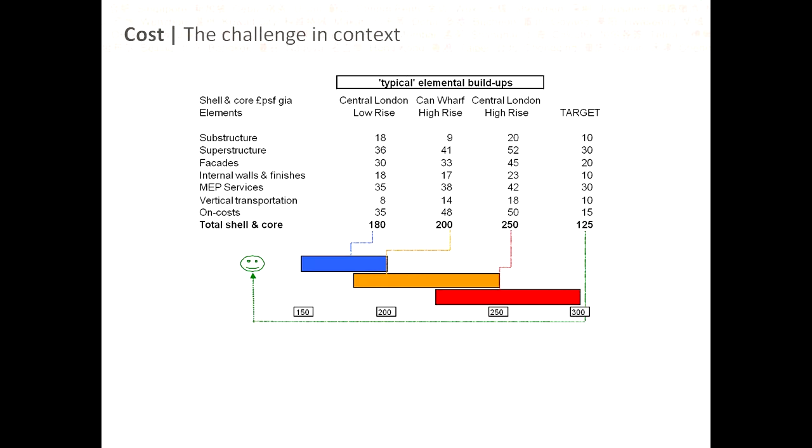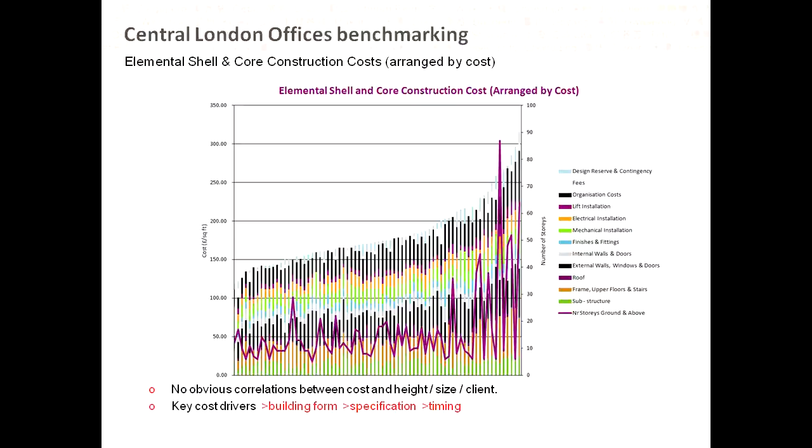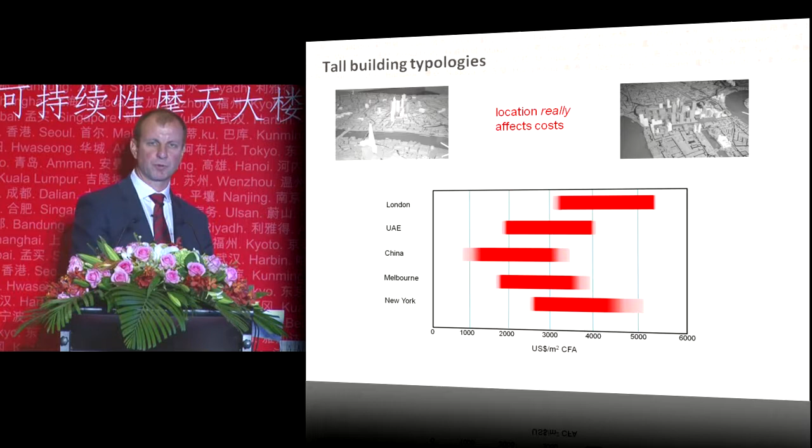During the study, we're also keen to try and learn lessons from around the world. As you can imagine, there's a large range of costs globally too. Some of that is down to labour costs, some of that is down to other factors, but again, shape plays a large part of that. Even in London, where you've got the fat functional towers of Canary Wharf in the Docklands area to the east of the city, very, very different cost profiles to the more articulated landmark forms in the centre of town.

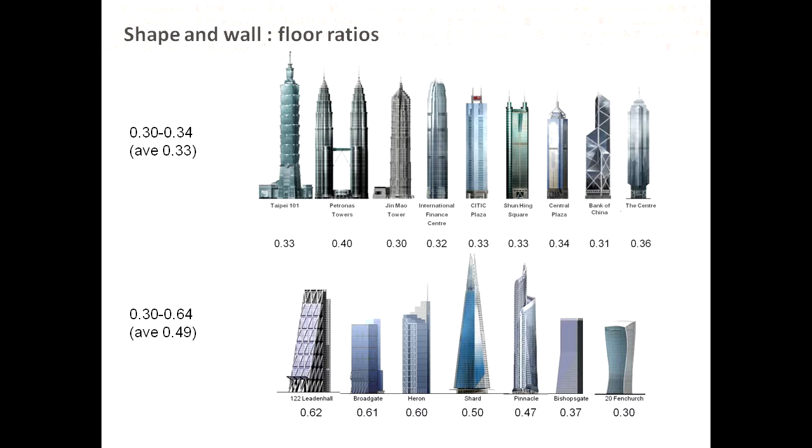So those Asian buildings along the top, although architecturally very interesting, iconic structures, perform very well in terms of that metric. Whereas along the bottom, those selection of London buildings don't. Most of those are 0.5, 0.6. So to a large degree, some of those, before you even start thinking about the specification of facades, have double the quantity of the facades, and that can affect the bottom line by over 10%.

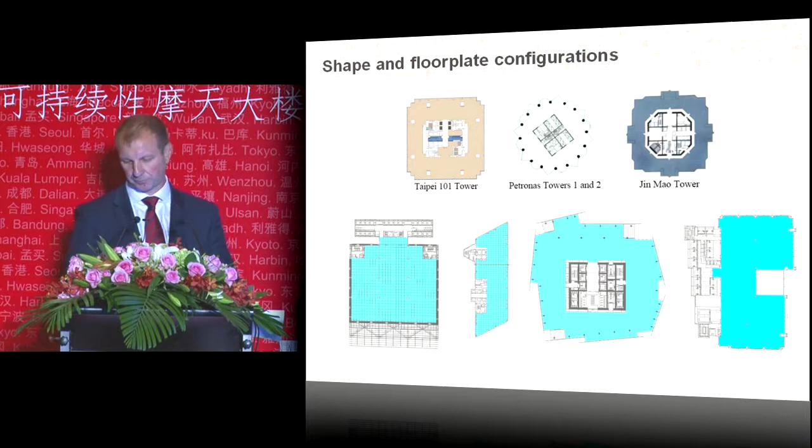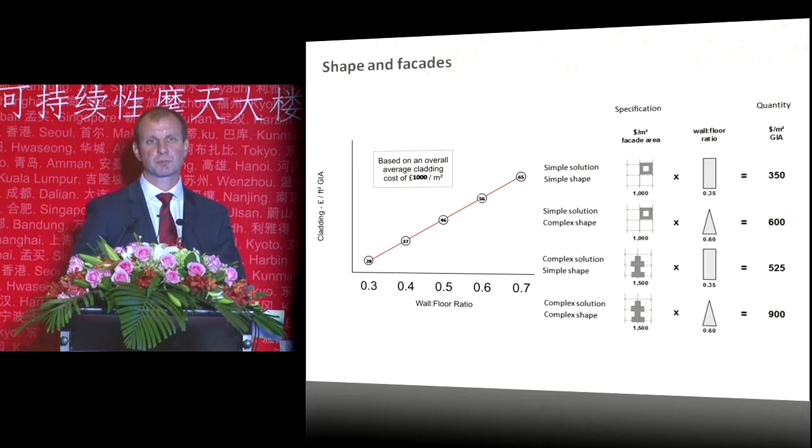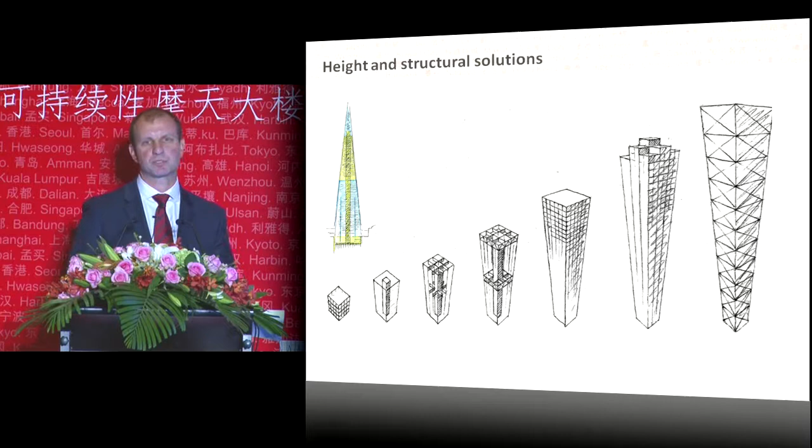Actually, it's a very, very simple structural solution in relative terms. It's got a very large central concrete core which copes with most of the lateral wind loads, and therefore it enables it to have a pretty simple steel frame around it.

You then compare that to the Leadenhall building, which is a very different approach for different reasons, but that's a relatively complex exterior megaframe. It's expensive and it's quite involved, but it does create a large, impressive office floor plate with few columns. It also enables quite a nice interaction at the base with the public realm surrounding it. So there's a value equation there too.

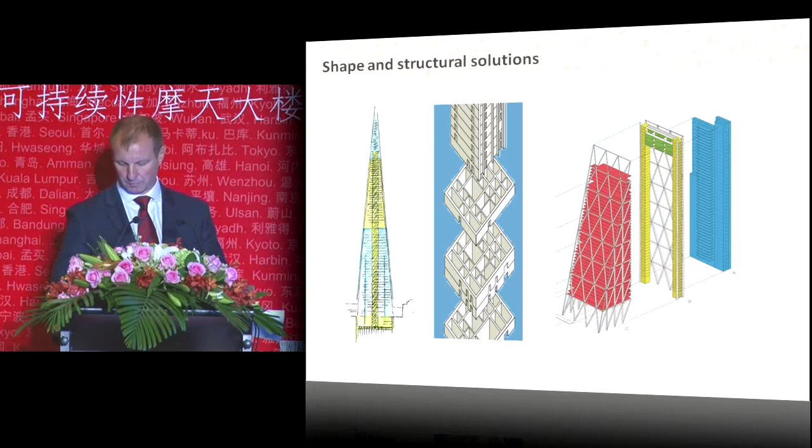So after 8 or 9 months, these were the forms that we came up with as being perhaps the optimized floor plates for this challenge that Sir Stuart set us. In the process of this cost evaluation, what we realized is that we're actually creating a baseline building. So it's not a design. It's a form of optioneering and being able to make comparisons on a quantitative basis, which we really don't do that often. Not at this speed and these amounts of options normally.

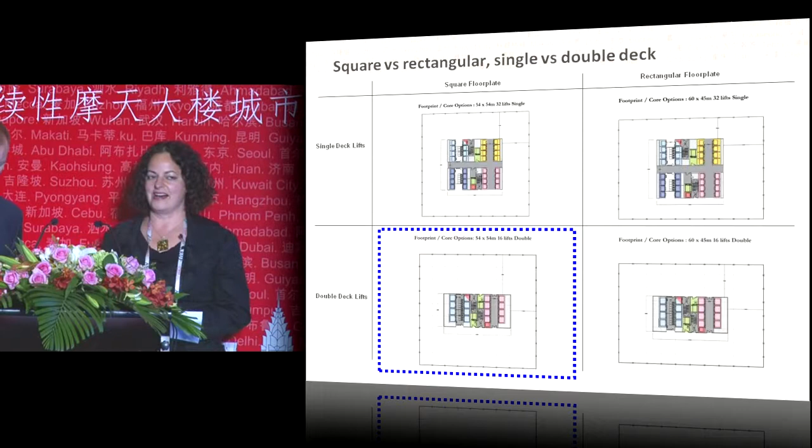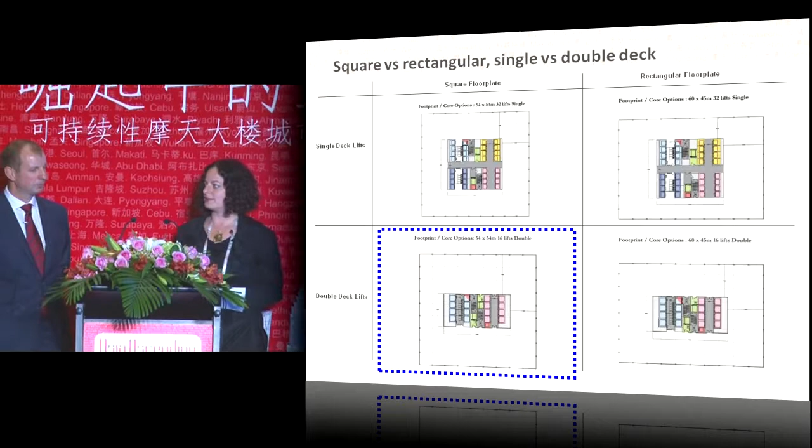We did opt for the square floor plate in the end, with double-decker lifts, curtain wall facade, long span steel building, and at that point we were asking, well, okay, but how sustainable is this option now? So from a cost perspective, just remember that challenge I set in one of the earlier slides, £250 a square foot.

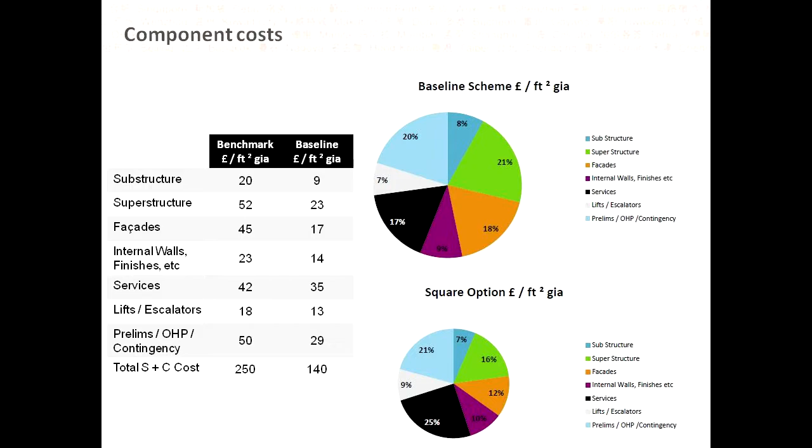Frankly, I didn't think we had a chance of getting anywhere near to it, but we did. We got to about £140 a square foot. So in London terms, actually, that's pretty good for a low-rise building, let alone a high-rise building. And it was really the structures and the facades where the money just fell out of the equation.

And then that had a consequent effect on costs such as main contractors, preliminaries, contingencies, and overheads and profit, because we were simplifying a building, we were de-risking it. So what's interesting about that is that when you look at the new baseline scheme, what that does do is increase the relative importance of MEP services systems.

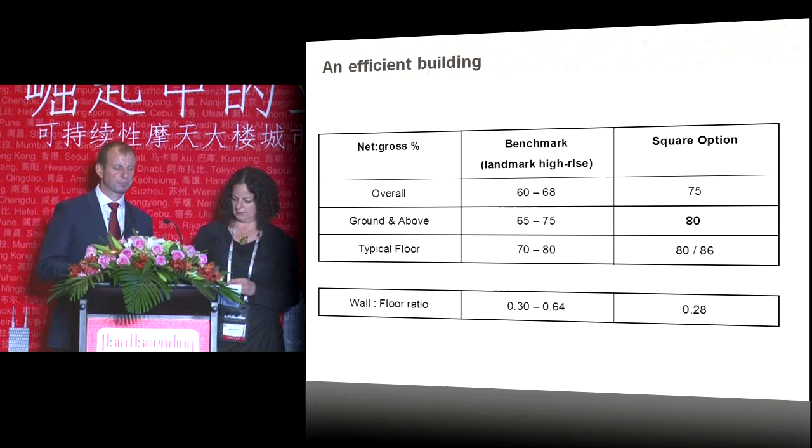And the systems that we ended up evaluating against one another were the curtain wall versus the concrete precast facade, the long span steel, long span concrete with downstand beams, the post-tension concrete versus the short span steel. The MEP systems were the VAV system versus the fan coil, the chilled beam, and then centralized versus decentralized.

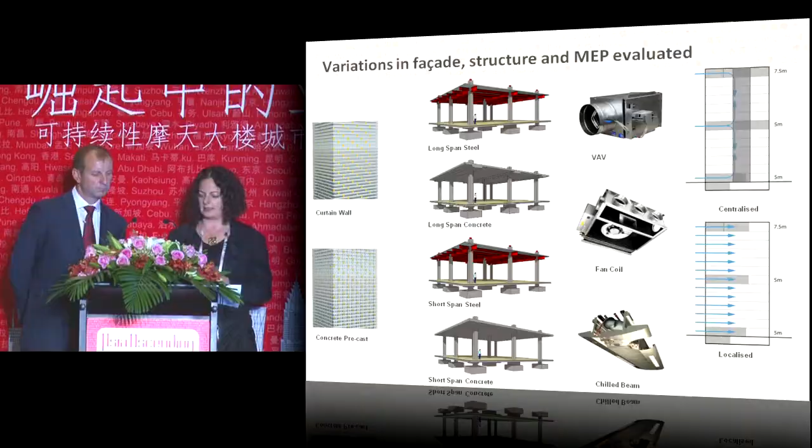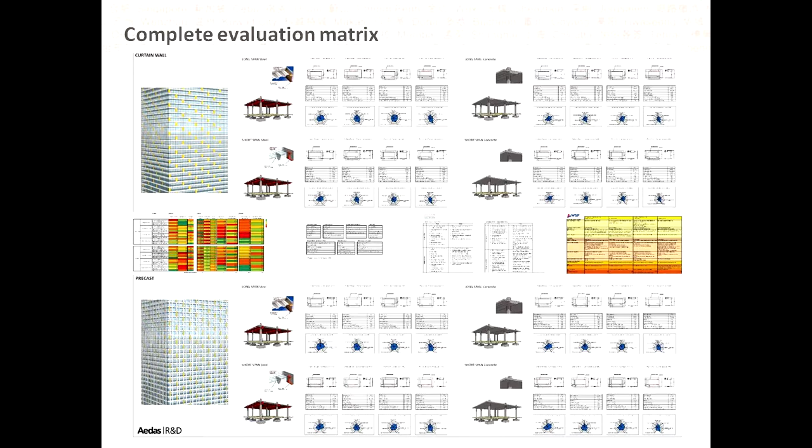And just to give you the idea, this type of evaluation is not necessarily that straightforward, because once you look at all the options against one another, you have quite a few to evaluate. But we did do all of this work, and some of the conclusions were really quite interesting.

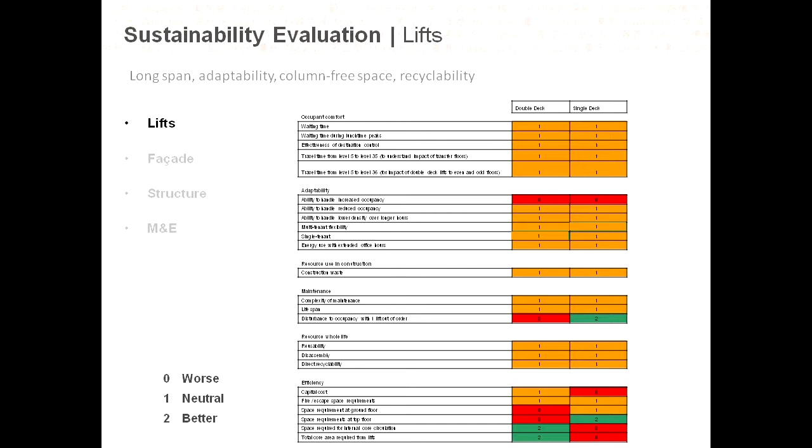Many people in my practice have asked me, well, why did we opt for the double-decker lift? Well, actually, in London, double-decker lifts are pretty much mainstream solutions. And the reason is the core saving: you can save up to 50% on core size. And the main concern is, well, what happens if the doors open above you and you're in the lift car below? But actually, typically less than 5% of all stops are those where only one deck is serving. And here are some international examples of double-decker lifts used.

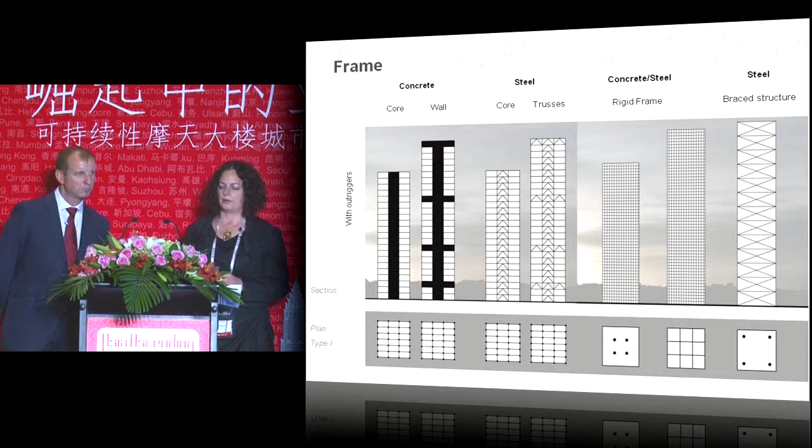Long discussion about the steel versus concrete. And clearly steel is the knee-jerk response from most designers and developers, because it's long span. In terms of adaptability, it's really great. You can cut holes in the floor plate with no penalties. It offers a column-free space.

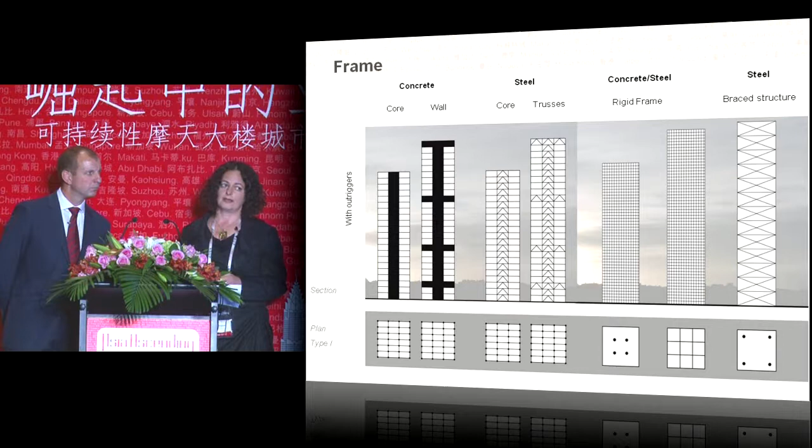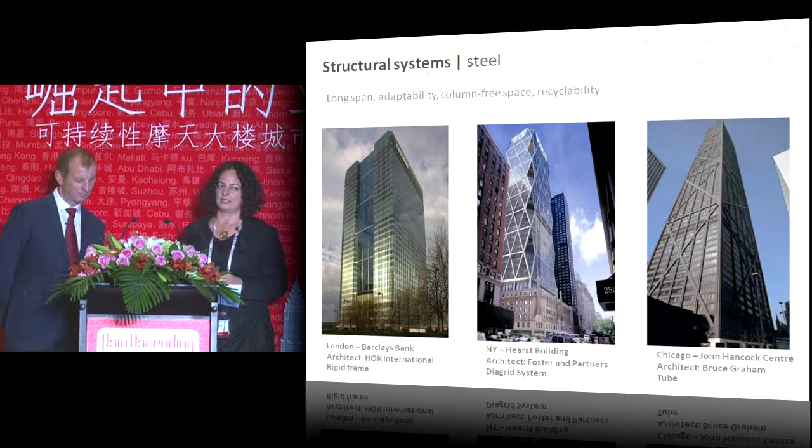However, there are issues with the recyclability, in particular when it comes to the fireproofing of steel structures. Some of these make recycling more or less difficult. In particular, as I got the lesson the other evening about fireproofing, the old epoxy-style systems make recycling particularly difficult, whereas there are some new water-based systems, thanks for the tip, that make it much easier.

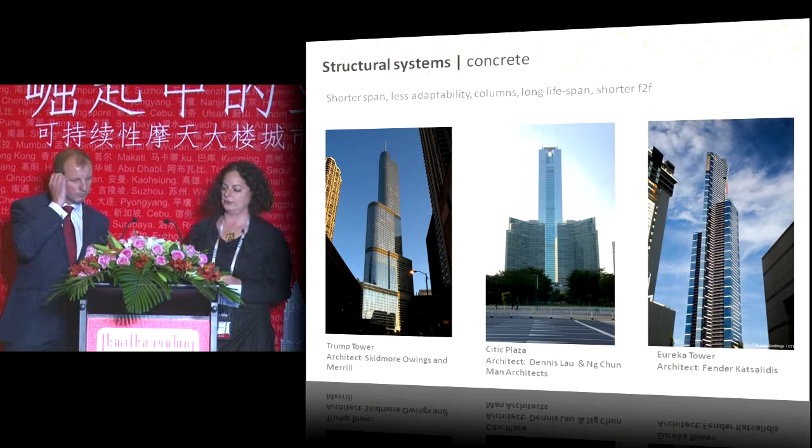In terms of concrete, clearly the shorter span is a bit of an issue. In order to make it more adaptable, you have to identify up front the areas where you might want to make openings in the floor plate. You get columns, although you can design some of them in a way that they don't obstruct the view too much. But the lifespan is very long. You design a tall concrete building, it's going to be there for a long time.

And what was the most remarkable about it is that when you do the post-tensioning, you actually get shorter floor-to-floor heights. So for the same number of floors, you can do it for a lot less height, which then ends up saving quite a bit on the facade costs.

I just flagged up the details of one of these evaluation matrices. So we've done this type of evaluation for every single component, looking at occupant comfort, adaptability, efficiency, resource use in construction, maintenance, and whole life resource use. The most important whole life aspect of structures is that they contribute 15 to 25% of the capital cost, but 50 to 75% of the embodied carbon. It is the longest lifespan component. So adaptability is more important in that sense for structures than for anything else.

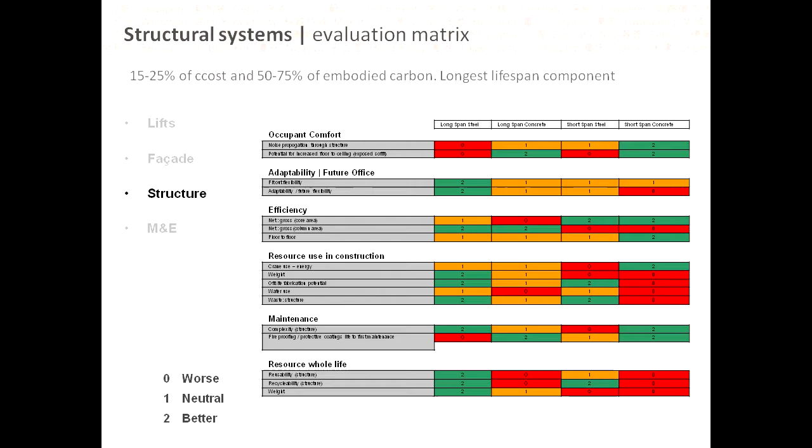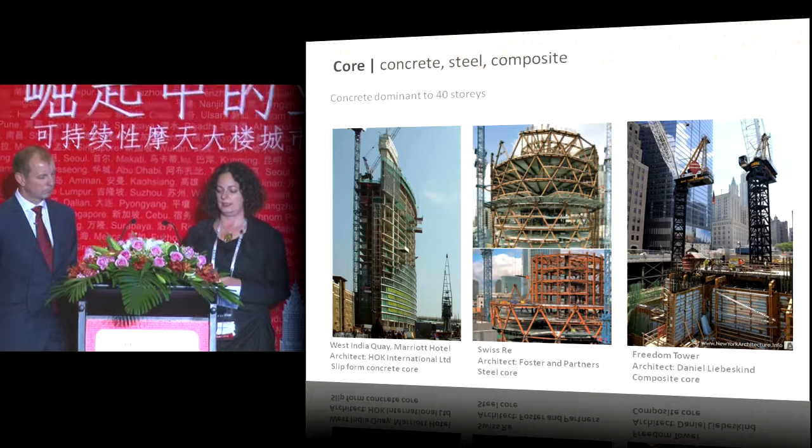In terms of cores, it does seem that when you've got a central core building, the most commonly used cores these days are concrete. They are dominant up to 40 stories. Above that, steel gets introduced. But the main reason for that is the fire, so the stability that it offers and the fireproofing. We've seen what happened in 9/11 with the World Trade Center towers. Composite cores are also often used where efficiency is really of the essence.

Looking at curtain walls versus precast facades, clearly the main advantage of curtain walls in capital terms is the efficiency. So it offers up to a 2 to 3% gain on the floor area, net area.

So it is the most obvious solution for most developers. Then there are the advantages of daylighting and other aspects. However, many other speakers have elaborated on this. In terms of solar gain and glare, they do present some challenges, which then cost extra to mitigate.

Precast facades tend to have craneage issues. There is a great example in London of a precast facade, the Centre Point. We did wonder during this study whether these facades are going to become more prevalent in the future, where the heat gain in high-intensity office buildings may reduce due to equipment being more efficient. We'll see what happens to that.

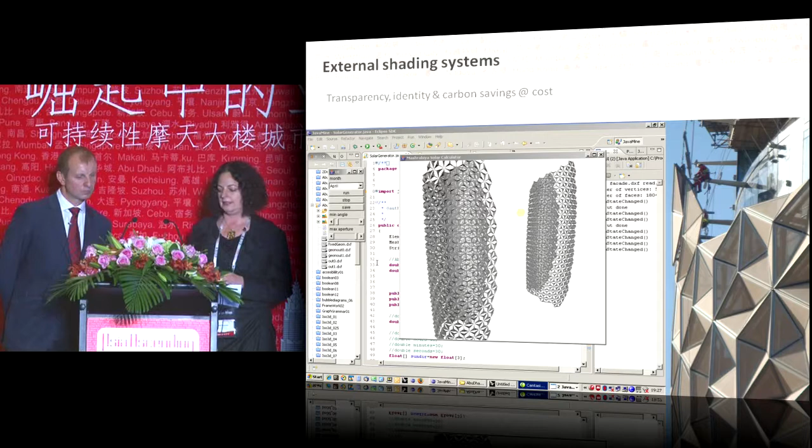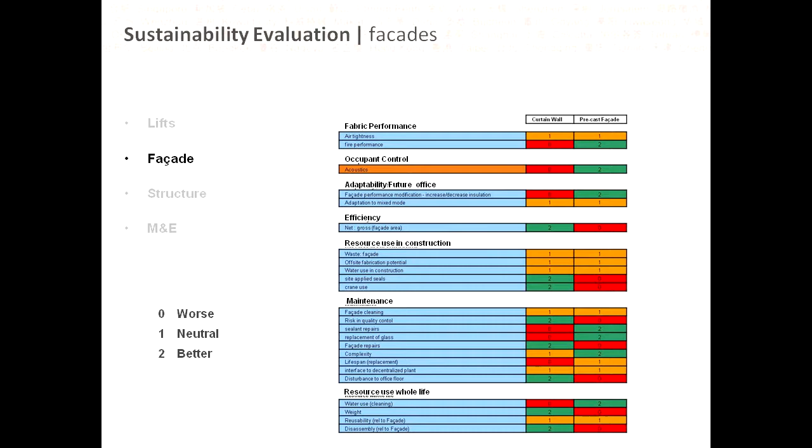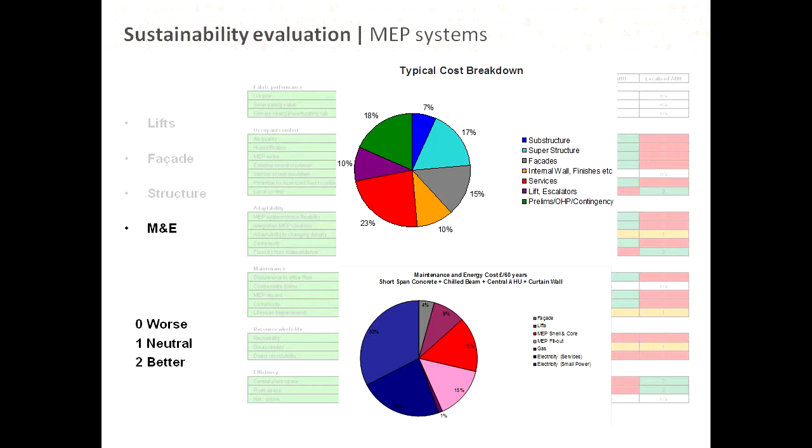The evaluation of MEP systems - we ended up spending quite a lot of time on the MEP system, which is uncharacteristic for architects perhaps. But we realized that once you're looking at a relatively low-cost building, MEP systems end up making up to a quarter of the capital cost of the building. And when you look at whole life cost, air handling is around 60% of it, and if you take additional replacement and fit-out costs, it's around 80 to 90% of whole life cost. This is a big number because whole life cost tends to outweigh capital cost by quite a large figure.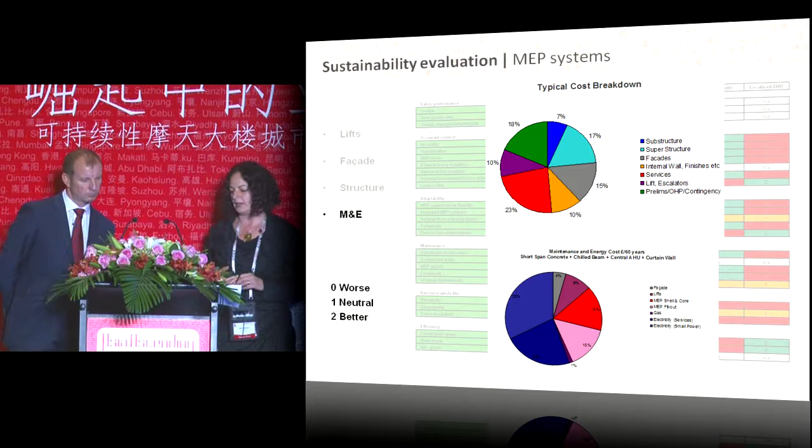In terms of ventilation systems, the prevalent systems in North America and the Far East are VAV systems, and that's for very good reasons. It doesn't require any intrusion into tenant areas, and it's got centralized maintenance, which means it can be quite well controlled. It is higher cost, so it's up to 15% cost uplift, and the efficiency of VAV systems is highly disputed. In the UK it's become very difficult to specify because it just wouldn't pass building regulations in most cases.

Going on to fan coil systems, clearly it requires tenant space access. This is really the mainstream solution pretty much all over Europe, and becoming more common or frequently specified elsewhere. It is a bit sensitive to maintenance, so a skilled workforce is required to maintain it, but it does offer a great deal of flexibility and control, and it's probably one of the most efficient.

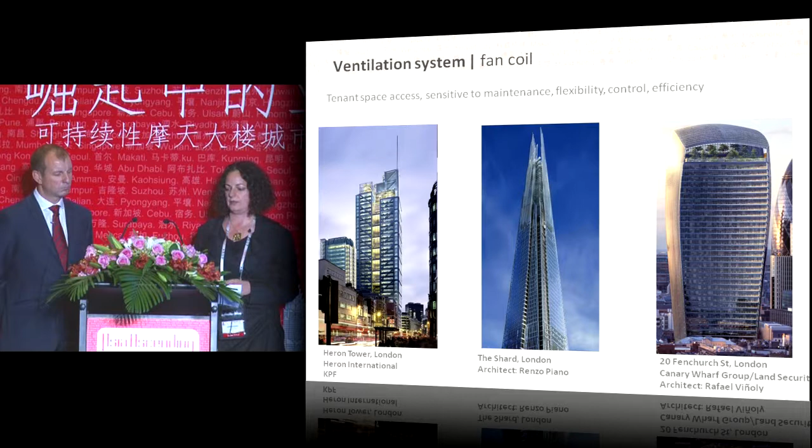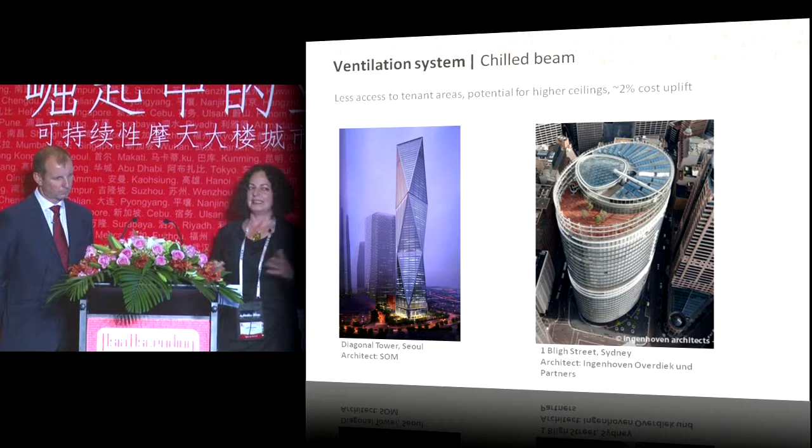Chilled beams are an alternative with a marginal cost uplift, but require less access to tenant areas, and also offer the potential for taller, exposed ceilings, which are becoming de rigueur in some developments. Certainly it does offer the flexibility to go for that type of fit out.

And mixed mode - I'm not sure if you've seen Anthony's publication on naturally ventilated tall buildings, a CTBUH publication that might be launched today or tomorrow. Mixed mode buildings are relatively rare. The reason is that in capital cost terms, they not only require the MEP investment, but also investment in creating openings in facades. But it does offer up to 8% savings on whole life costs, so approximately 10 to 15% savings on carbon emissions over a building's lifetime. With mixed mode buildings, occupants tend to accept more out-of-range environments, and Steve would say with some education.

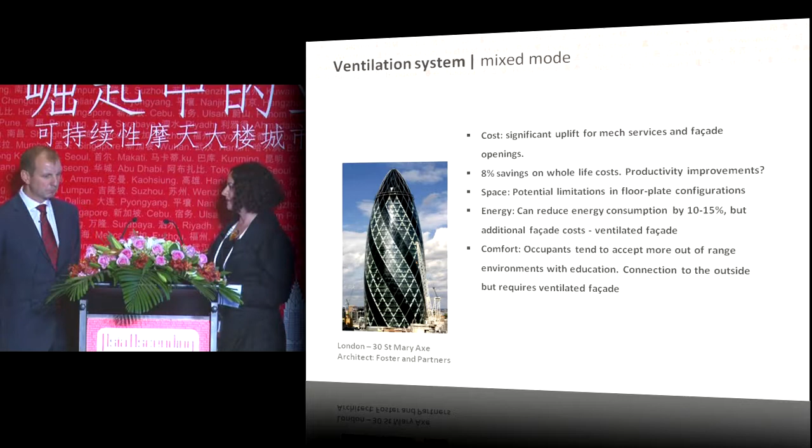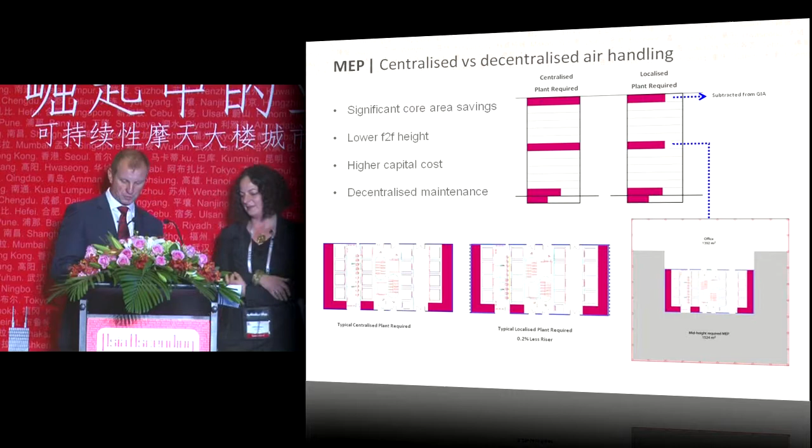Yes, do you want to say a few words about centralized, decentralized? The decision to go centralized or decentralized tends to be a space one rather than a cost one. It costs more to have more units and to spread your plant, but here's a good example.

I'm not going to comment on the architecture, I'll let you think about that yourselves, but this is Elizabeth House in Waterloo, London, currently in planning. Here we went for a decentralized system simply because we had severe constraints below ground, and therefore removing the interstitial plant room above ground actually created a lot of valuable lettable space. So there was a premium of several million pounds, but that was dwarfed by the increase in value.

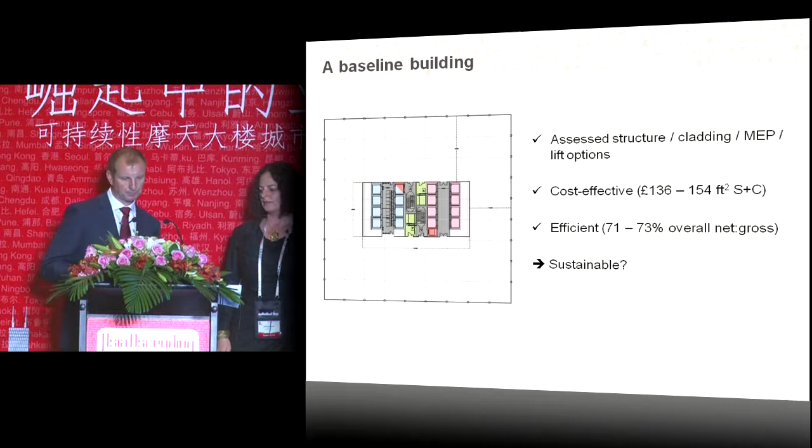I guess we've been given the 5-minute warning, so I'm going to speed up.

I guess if there's one conclusion that came out of this, it was that depending on which perspective you were looking from, whether it was people, profit or planet, almost without fail, you got a different answer.

And you've said it, but okay.

Weighting is everything. So what you build in one location may not be the right thing in another location, and what works for one type of developer may not work for another one.

So this allowed us to do the calculations, gather the data, and now we are in a position to weigh these up depending on the client, the location, and their preference, with a good understanding of the long-term impacts of these decisions.

So the soft metrics are certainly the most difficult to measure, but actually they have the greatest impact over the life of a building, and therefore we shouldn't shy away from attempting to measure and assess them. For me, this is perhaps one area for further study at some point.

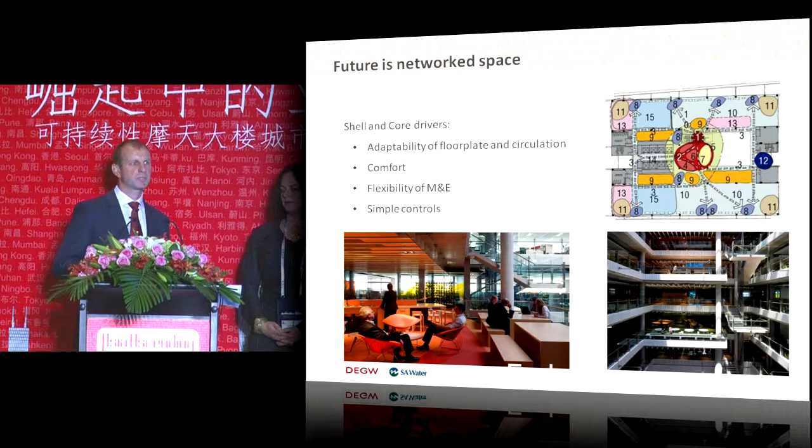When you consider the impact that people have on an office building, as Judith alluded to earlier, it dwarfs any consideration about capital costs. Over the 60-year life of an office building, 90 to 95% of its total cost is related to people, staff, salaries, and associated costs.

This is quite interesting. This is very confidential and a few days old. David Roden, architects, lent me this.

There is a very well-known bank in England which is actually starting to get interested about the principles that underpin this study. They're now encouraging us as a team to look at an office building which creates a different product, where we can start from a rational viewpoint.

Very simple, elegant but cost-effective facades, a very straightforward structural frame without complexity. And the money saved from some of those key elements we can either factor into a reduced rent, or reinvest into the workplace, creating interesting spaces, double height spaces, and increased floor to ceiling height.

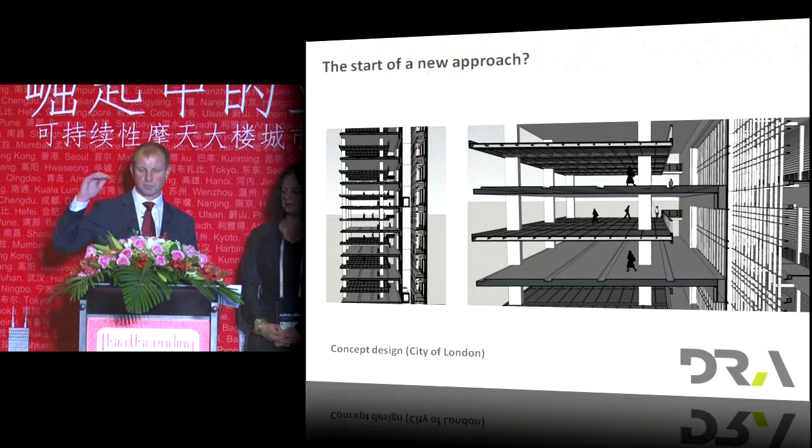This system works on a duplex office arrangement that comes in units of two, with a lightweight mezzanine structure between the two, and it's creating quite a bit of interest.

This is one of Judith's. Works well with double deckers. Yes, yeah.

This is a scheme we developed recently for number 1 New Oxford Street. A colleague of mine, Simon Bowden, led the project.

What we did here is increase the generic floor-to-floor height of the building to allow it to be converted from residential to office and vice versa. The second thing we did was make the floor plate shallower, which you would say, okay, but that becomes a grade B office space.

Do tenants really mind? So in some ways this counts as a boutique office development, but the question is, will these take off in the future more?

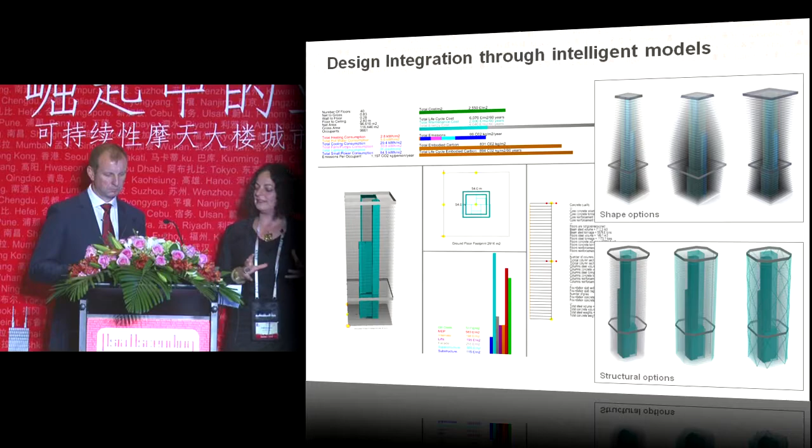Just a very quick animation to show you that we built this study on the back of a previous study we did, which took many of these drivers and relationships and encompassed them in a parametric model.

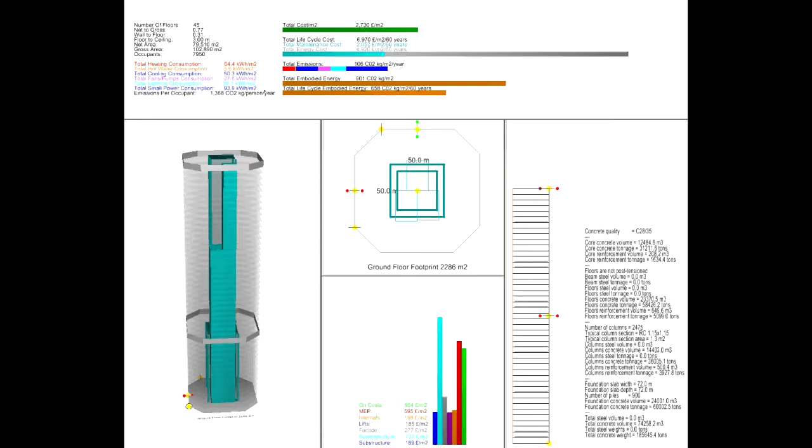So you can effectively type in a net area and arrive at the right number of stories in the building, and get updates of the capital cost, the whole life costs, the operational carbon and the embodied carbon as you change the shape and height of the building. The important thing is that you're assessing all of those things at the earliest design stage.

So, final slide. When we finished the study, we took Peter Rees, who's the City Corporation's chief planner in London, through it. In many ways, he's responsible for the developing skyline in central London, which has a number of icons and potential icons characterizing it, and we asked some fundamental questions and had quite an interesting and lively debate about it.